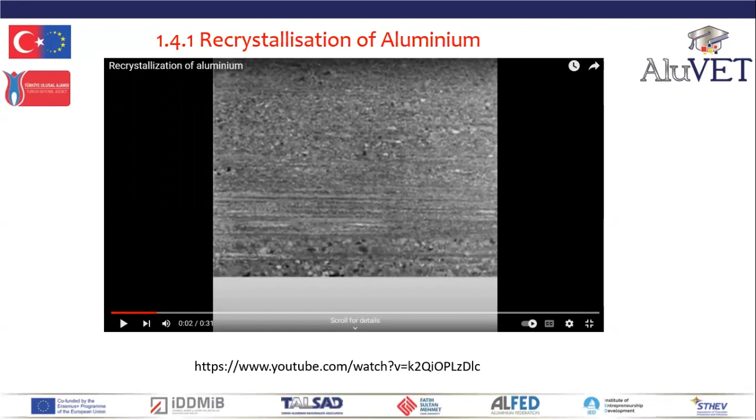Now I've got a little video that shows the annealing process, and it shows the grain recrystallization. Note the time for annealing. So you're watching a cold work structure gently re-annealing, and you can see new grains growing throughout and reappearing. You are looking at annealing of a heavily cold worked metal in the video.

And you can see completely new grains have grown throughout the annealing process. Now, the recrystallization of cold worked grains is annealing. And once all of the grains have been recrystallized, the structure is said to be fully annealed, and the strength and the ductility will be restored to their original levels. So an annealed structure has low strength and high ductility.

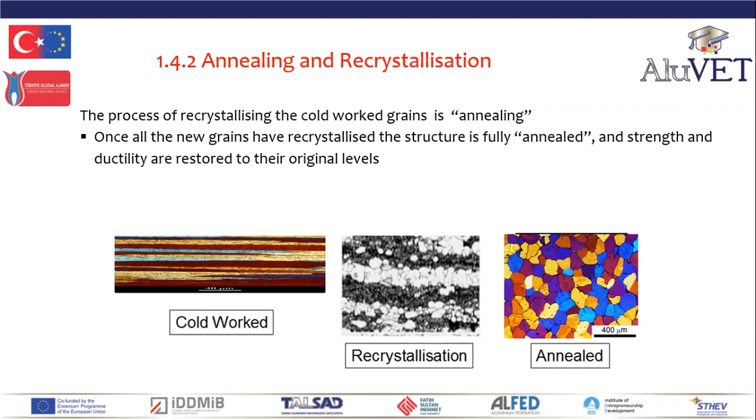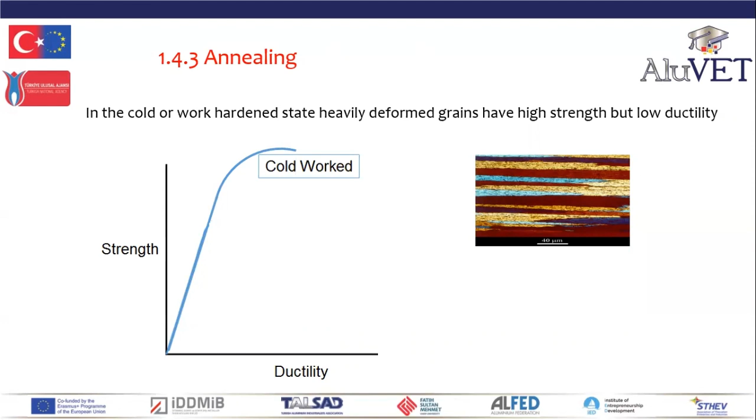In the cold or work hardened state, the heavily deformed grains have high strength but low ductility. Once all of the grains have been recrystallized, the structure is said to be fully annealed, and the strength and the ductility are restored to their original levels. So you can see the cold work structure, and you can see the ductility is increased upon annealing.

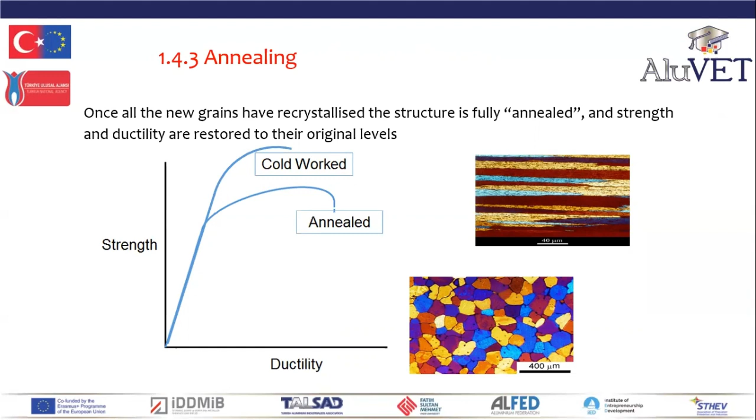So far we've spoken about cold work. Cold work is the physical reshaping, deformation of a metal at ambient temperature. We're now going to consider hot working. Hot working is when metals are mechanically worked, rolled, extruded, deformed above their recrystallization temperature. So hot working is approximately 50% of the melting temperature. Aluminium alloys melt between 600 and 650 degrees C. So hot working would be temperatures over about 300 degrees C for aluminium.

Now, hot working temperatures are above the recrystallization or the annealing temperatures. Above the recrystallization temperatures, metals constantly recrystallize during deformation, so they do not strain harden or cold work. So when you hot work a metal, because you are above the annealing or the recrystallization temperature, very roughly 300 degrees C for aluminium, the metals automatically and instantly recrystallize, grow new grains, so they are effectively auto-annealing.

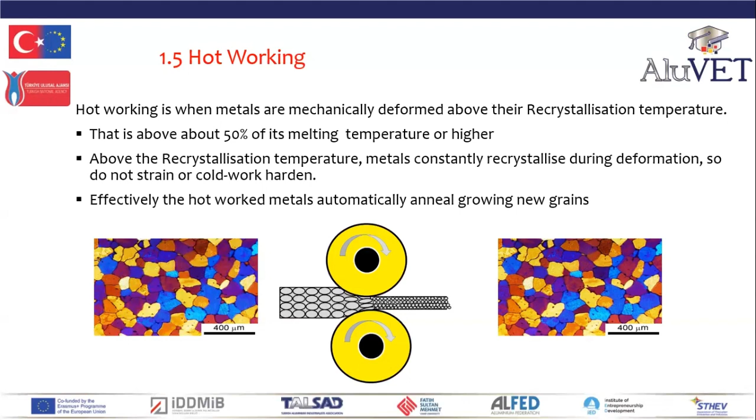So during hot working, we now understand, because we are instantly re-annealing the grains, they are not work hardening. We're seeing no strength increase, which means ductility remains high, the malleability remains high. It means that we can heavily hot work metals at high temperatures.

Now, at elevated temperatures, the atoms thermally expand. Remember expansion. Now, expansion weakens the metallic bond, so both the yield and tensile strengths of metals reduce at higher temperatures. So both the yield and tensile strength of aluminium at hot working temperatures is significantly reduced. The weakened metallic bond results in the yield stresses to work, reshape, and deform aluminium reducing significantly to very low levels.

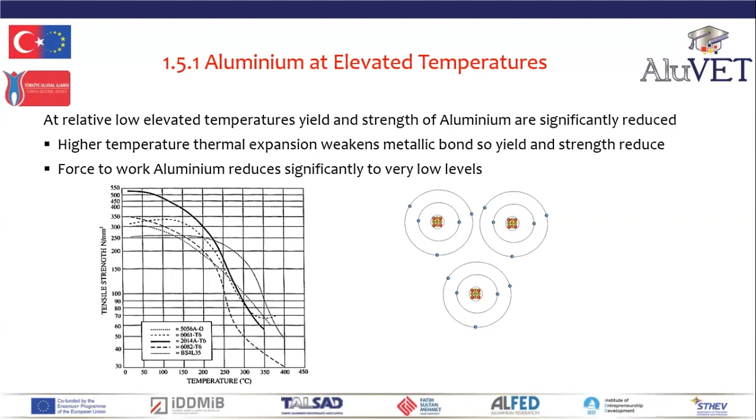Now, extrusion and hot rolling temperatures are higher than the recrystallization temperature, so the deformation forces, the forces required to reshape hot worked aluminium, are dramatically reduced to perhaps only 10% of those required at room temperature. So at hot working temperature, we require low forces. We can achieve very high deformations.

Now, at elevated hot working temperatures, the atoms thermally expand. The expansion weakens the metallic bond, so the aluminium becomes extremely ductile, superplastic. This allows large amounts of deformation, reshaping without failure. Thus, hot working enables high reductions, such as extrusion and change in shape, without failure at extremely low working forces.